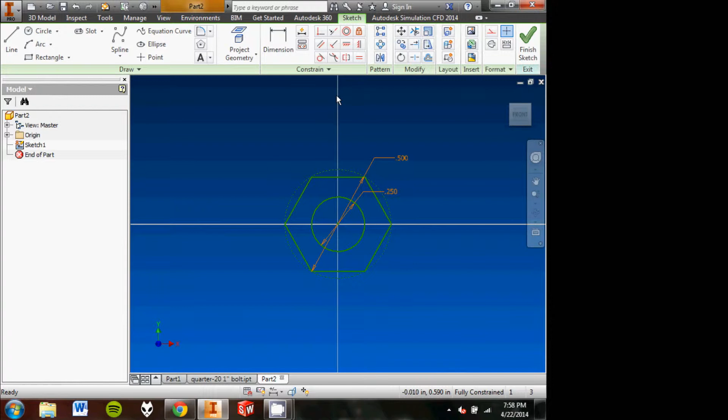So from here now we have something that looks like it could be a hex nut if you were to take it and extrude it. So we're going to finish the sketch, and then we're going to use our extrude tool again. Now here, because we have a couple different polygons in here that could possibly extrude, it doesn't automatically select.

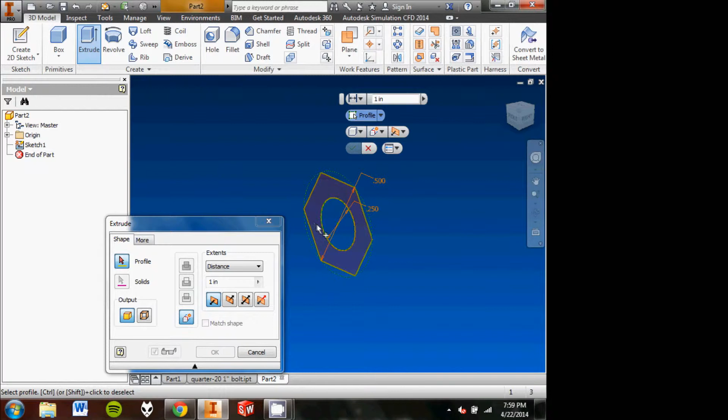For example, you could click on that inner circle, and it would try to make a cylinder from that inner circle. Or you could click on the hexagon, and it'll make the hexagon minus the inner circle. Or if you click on both, it'll make both. So you can tell which it's trying to extrude because when you mouse over it, it'll highlight it partially red. So you're going to want to click on that middle part there with the hexagon.

And then we're going to extrude it 1/4 inch, or let's extrude it 0.2 because that's fairly regular for a bolt. And from there you have a hex nut. All right, you have your extrusion.

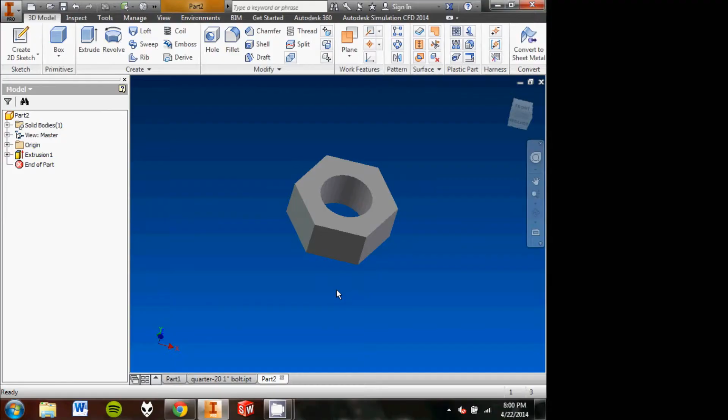All right, now something that you can do to practice is let's try to create a bolt that will work for this extrusion. The bolt will have the actual bolt length, which will just be a cylinder, and that can be 1 inch long. That can be however long you want it to be, and then it'll have a bolt head, which for our purposes can just be a circle with a hexagon in the middle to put your wrench. So let's do that. Create a new part and try it out.

Now you have two parts that you've made. You have your nut and you have your bolt. So in real life you need to put them together, but you don't want to do that by putting them together in the same part, because then they'd stay together, and you want each part to be a separate physical object like you'd have in a real object that you build.

So what comes in here is something called the assembly. What the assembly does is it takes two separate parts and you can add a number of constraints so that they basically merge with each other. So from the same drop-down menu that you created your part from, you're going to select assembly, and once it feels like it, it'll make a new assembly.

So from here, you have a blank assembly. It looks like a part, but the difference is instead of creating sketches to make the part, you're going to place two or more parts and join them together. So you click on the place tool, and you go to wherever you saved your parts. I just saved mine to the desktop. And then you click on one, and it allows you to place it.

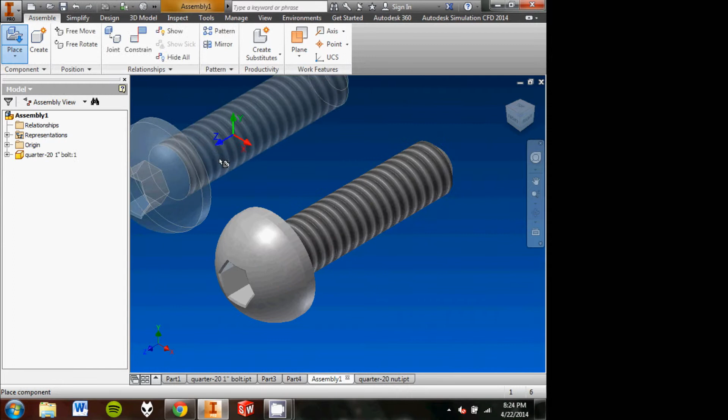You can place multiple. I could place like 4 if I was adding 4 bolts to a piece, or you can place just one and cancel out of it. So now I have my bolt, and now I'm going to go in and place the nut. And as of right now, you can drag them around freely. They're not joined to each other, so we need to fix that.

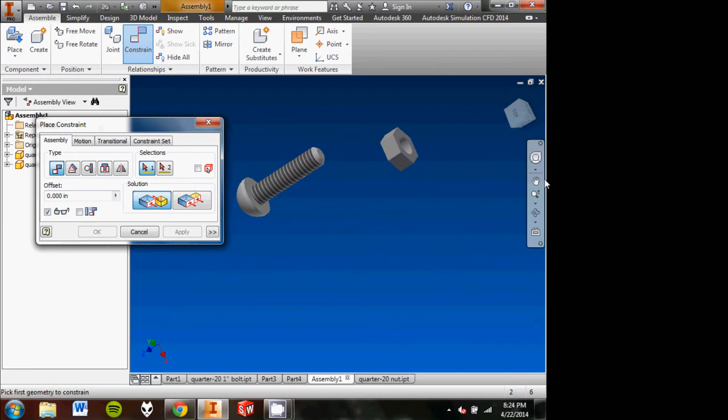Now, the first constraint you're going to use is actually a circular constraint. It'll be able to tell what you're trying to do. So from here, you can just zoom in on the cylinder inside of your nut and click anywhere in the cylinder, not on the circle around the perimeter of the cylinder, but the actual cylinder, and you'll see a dashed line representing the center of that circle.

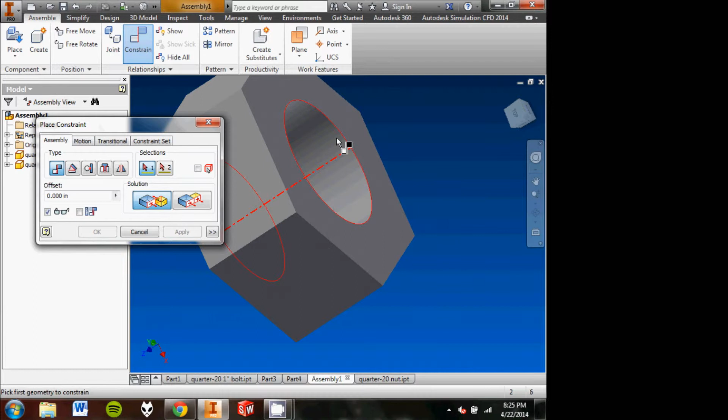So now you can still drag it up and down on the bolt, but it stays true to that dashed line. So from here, what's probably the most common constraint you'll see is simply merging two faces together.

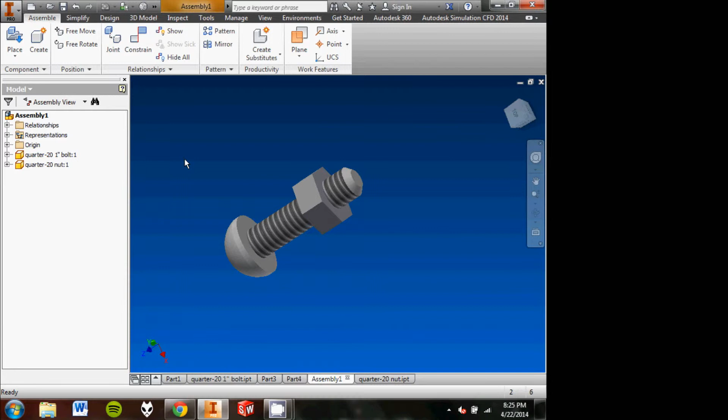So constraint, if you click on one face, you'll see a vector showing the direction that the constraint is being placed in. And you know that's the direction that the second face is going to be attaching it from. So you click once on that face, rotate your model, click on the second face, and now it'll join those two faces together.

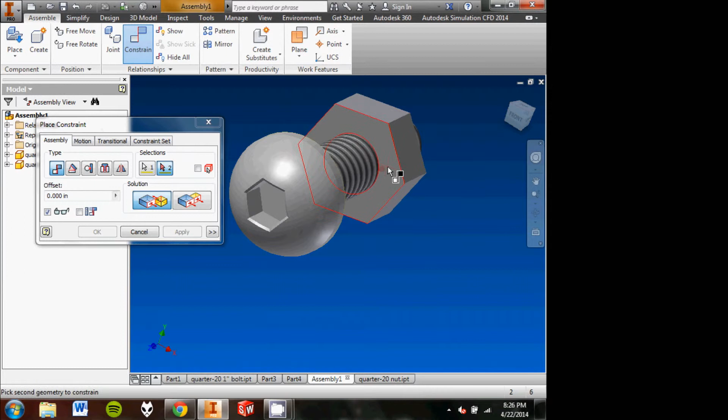So you can still rotate the nut on here, but it's now joined to that central part of the bolt, and it's joined to the face at the end of the bolt. When you get into full CADs, like for example the CAD of the robot this year, you'll have a number of layers of assemblies. For example, for the shooting mechanism this year, there is an assembly for the spring that went into an assembly for the shooter, that went into an assembly for the pickup, that went into an assembly for the full robot.

So you'll see that really keeping an organized hierarchy helps keep everything in line, and you can zoom into individual parts and try to focus on editing just those parts. For example, over here, this is a render of, oh, where'd it go? Whatever. I used to have a picture of the render of just the shooter module, and you could isolate that because I had that shooter module as a separate assembly. And within assemblies, you can actually place other assemblies, and they'll act as a part.

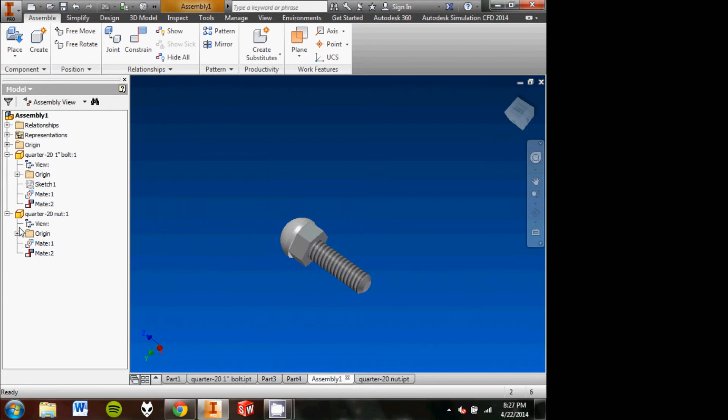Also, something I should probably talk about is this menu up here is probably one of the most useful things that you can have, because it shows you how everything is organized in an assembly. Right now you see you have the two parts, the nut and the bolt. So from here I can open up the menu and I can see the individual parts. I can see their origins, that sort of thing, and I can also see the places where they're constrained. You can also get to that menu in the sketch, and that'll give you more detail in terms of what your extrusions are and what sketches those extrusions are based on.

Another really fun part with constraints is if you decide to go back and change a part and you have to redo an extrusion because you've edited the sketch too much, what I've run into a couple times in CADing the robot this year is that it will actually delete any constraints that you have. So you'll be moving the arm, and then all of a sudden, all the nuts and bolts that were attached to that arm will just be gone. So to prevent that, keeping things in multiple assemblies is very helpful.

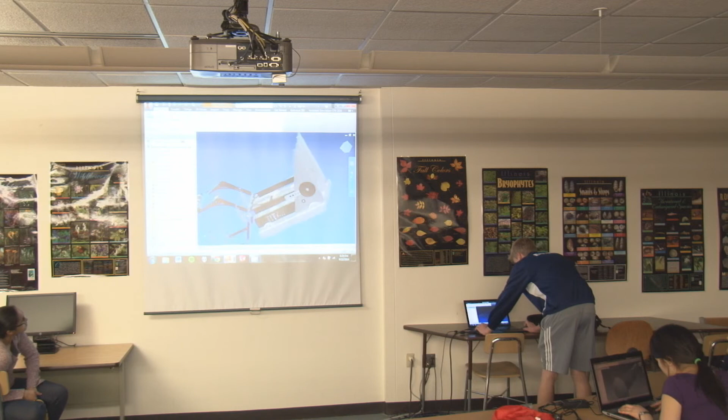So this is a CAD for the robot this year, and as you can see, there are a number of assemblies. And in here, let's say go into pickup, it opens up. There are assemblies here. There are more assemblies here.

Did you put all the holes in? All the holes in? Yeah. Why wouldn't I? I mean, we had to manufacture them. They weren't in earlier.

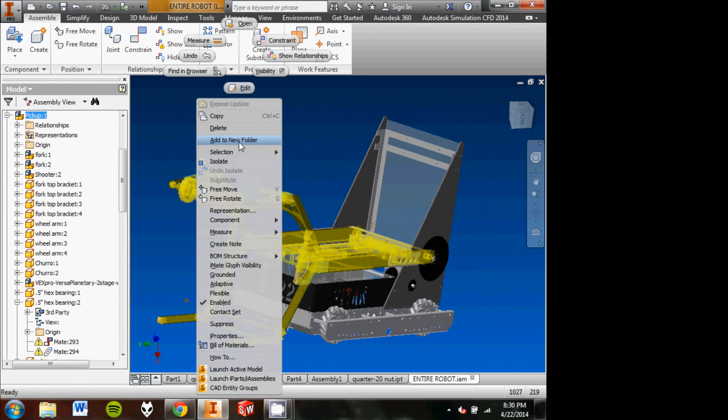When you get into parts like this, it's really important that everything's how it should be. For example, this is a part that we gave to Mad Labs to have them cut it. So from here, I needed to make sure that all of the dimensions fit in the CAD perfectly before having this part manufactured, so that when I exported this model and gave it to Mad Labs, they took their plasma cutter and they cut this actual physical piece out of sheet metal that it would fit in the CAD with everything. And other than the chain, it did.